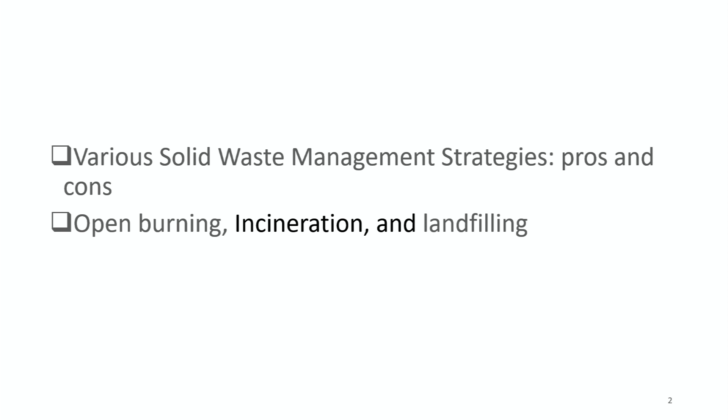We have taken various solid waste management strategies, pros and cons, as well as open burning in previous lectures. Now I am going to undertake incineration. Incineration is a chemical reaction in which carbon, hydrogen and other elements in the waste mix with oxygen in the combustion zone and generate heat.

Incineration is a thermal waste treatment technique that can be understood as a controlled combustion process with the primary objective of waste volume reduction and energy recovery from the waste stream. According to the World Health Organization, the incineration process involves a high temperature, about 200 to 1000 degrees centigrade, dry oxidation process that reduces organic and combustible waste to inorganic incombustible matter, resulting in a significant decrease in overall waste volume.

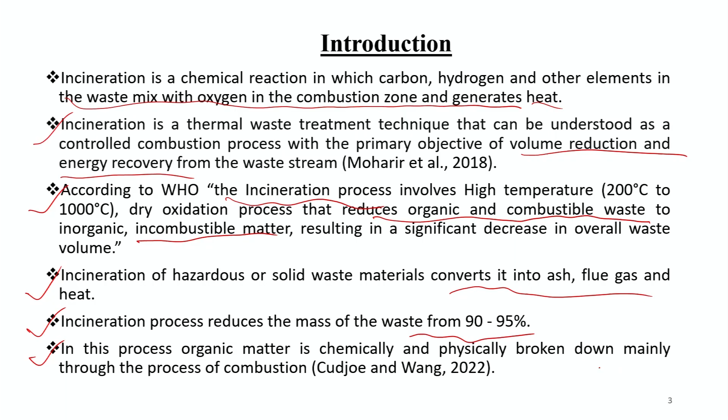Incineration of hazardous or solid waste material converts it into ash, flue gas and heat. The incineration process reduces the mass of waste by 90 to 95%. In this process, organic matter is chemically and physically broken down mainly through the process of combustion. Objective of incineration: by burning solid waste, incineration aims to reduce its volume to around a tenth while avoiding the production of harmful gases and ashes.

Especially the following objectives are pursued by the solid waste incineration process. First is volume reduction. Incineration reduces solid waste volume and weight by 90% and 70 to 75%, offering environmental and economic benefits. It reduces the landfill demand. Next objective is stabilization of waste. Incineration output such as ash is more inert than input due to organic waste oxidation, reducing landfill management issues and organic compounds in landfill leachate.

Third is recovery of energy from waste. Solid waste incineration is a valorization method that uses energy recovered from waste to generate steam for electricity generation or export to local factories or heating schemes. Valorization means the generation or production of value-added products from the waste. This method can replace fossil fuel use and has a lower net carbon dioxide production than burning fossil fuel.

So, the lower fossil fuel use can help the economy of the country as well as save the money of the people doing that. This method can replace fossil fuel and has lower net carbon production than burning fossil fuel, as most energy comes from renewable resources like biomass. Combined heat and power plants increase efficiency. Sterilisation of waste.

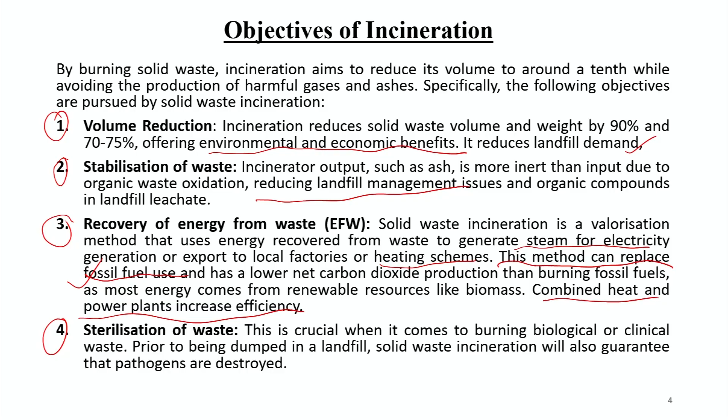This is crucial when it comes to burning biological or clinical waste. Prior to being dumped in a landfill, solid waste incineration will also guarantee that pathogens which may be present in that waste are destroyed. Working principle of incineration: waste materials are disposed of by the incineration process, which operates on the concept of controlled burning. A condensed explanation is given below.

First, the primary combustion chamber is there. A burner is used to ignite waste materials once they are delivered into this chamber. As the waste organic material burns, heat, ash and gases are released. Second, it goes to the secondary combustion chamber, to generate full combustion and lower dangerous pollutants. The gases from the main chamber are further burned here.

Next is air pollution control. To reduce their negative effect on the environment, modern incinerators are outfitted with equipment that filters and treats the exhaust gases. Next is energy recovery. It is an energy efficient waste management method, as the heat produced during the process may be converted into steam or power.

This is a figure showing the diagram of an incinerator, where there is an ash door, a waste or feeding material inlet, a grate combustion air inlet, a burner for burning the waste, and at the upper side a flue gas outlet.

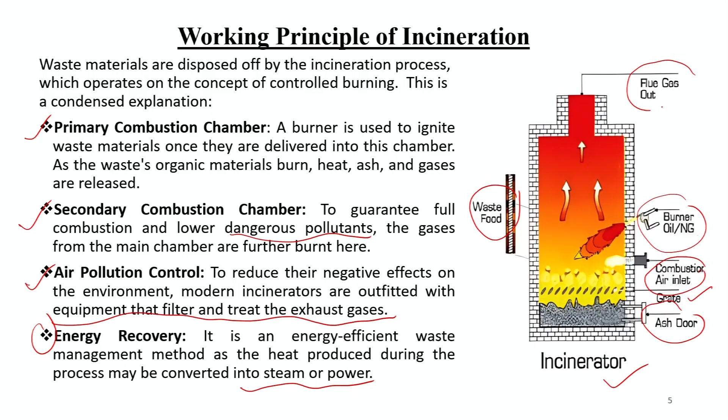The functioning method of incineration. The incinerator's secondary combustion chamber is used to burn off any leftover exhaust fumes, while the primary combustion chamber is used to burn the solid waste or sludge oil. The primary combustion chamber is equipped with a primary burner that is originally ignited by diesel oil. The sludge oil is then fed into the primary burner until it ignites. After that, the main burner is either manually or automatically extinguished.

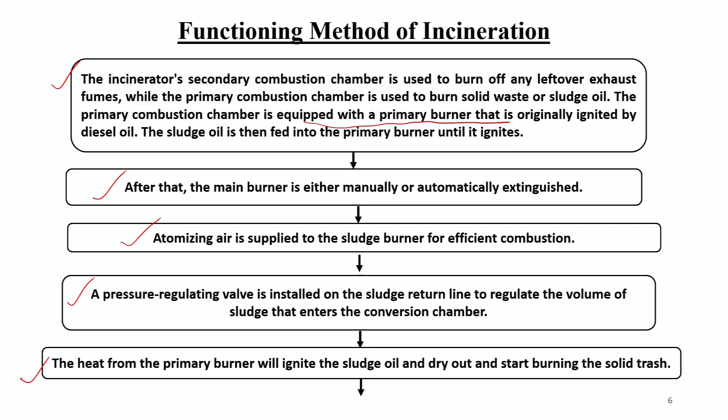Atomizing air is supplied into the sludge burner for an efficient combustion process. A pressure regulating valve is installed on the sludge return line to regulate the volume of sludge that enters the combustion chamber. The heat from the primary burner will ignite the sludge oil and dry out and start burning the solid trash. Thereafter, the massive transmission area of the primary combustion chamber maximizes the drying and burning of the solid waste.

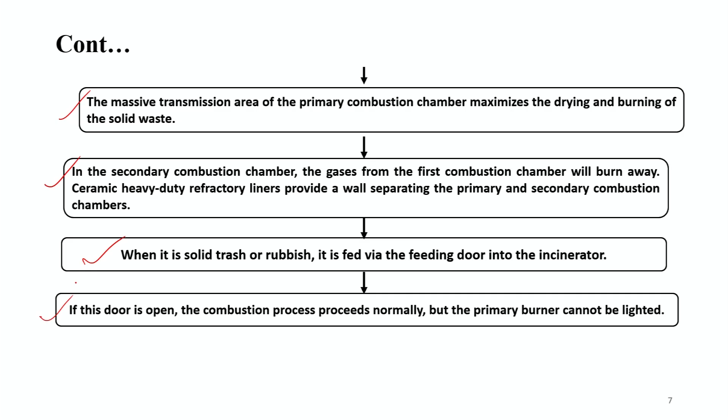In the secondary combustion chamber, the gases from the primary combustion chamber will burn away. Ceramic heavy duty refractory liners provide a wall separating the primary and secondary combustion chambers. When it is solid trash or rubbish, it is fed via the feeding door into the incinerator. If this door is open, the combustion process proceeds normally, but the primary burner cannot be lit.

This figure shows the process of municipal solid waste incineration power generation, where this is where the waste is fed. There is an incineration boiler in it.

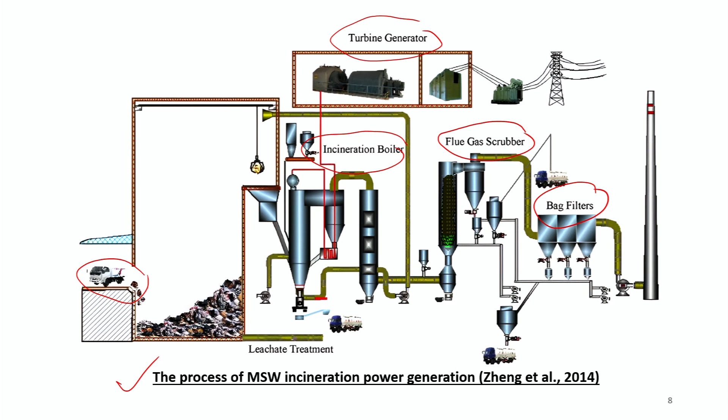There is a turbine generator from which the electricity can be generated. There is a flue gas scrubber where the gas getting out should be cleaned. There is a bag filter to avoid any air pollution or particulate matter pollution, and there is a leachate treatment also, so that we avoid leachate contamination from the waste.

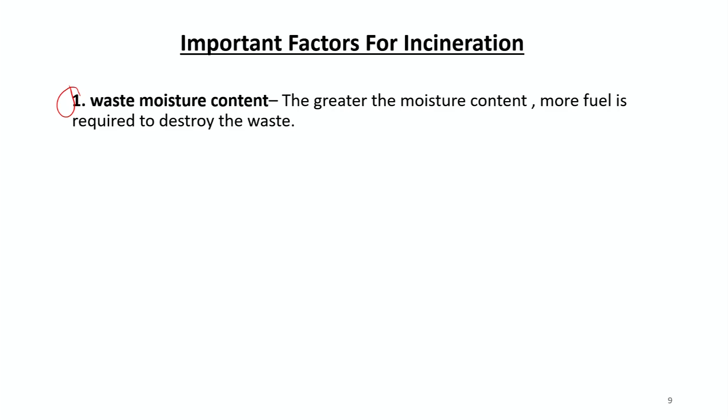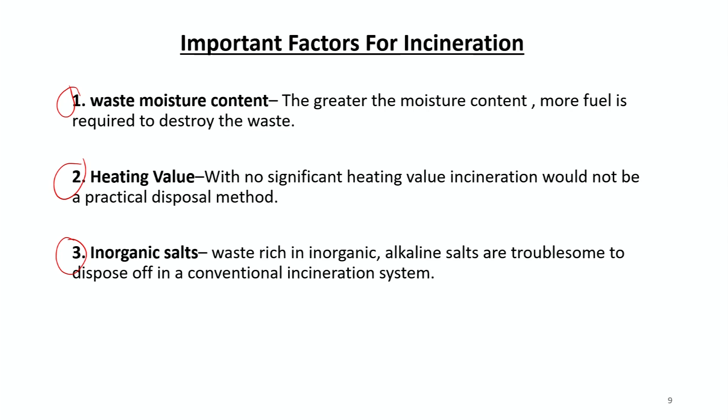The important factors for incineration: first is waste moisture content. Greater the moisture content, more fuel is required to destroy the waste. Second is heating value. With no significant heating value, incineration would not be a practical disposal method. Third is inorganic salt. Wastes rich in inorganic alkaline salts are troublesome to dispose of in a conventional incineration system. Fourth is high sulfur or halogen content. The presence of chlorides or sulfides in waste will normally result in acid forming compounds in the off gas.

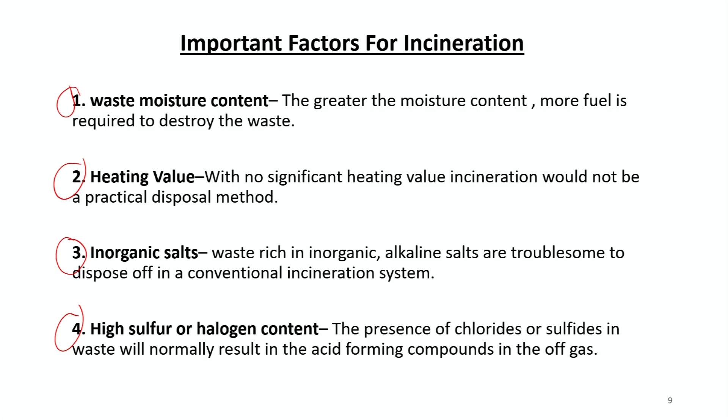Advantages of incineration. Because incinerators are small devices, they may be installed at the location where garbage is generated or in transfer stations, allowing for incineration to take place close to the waste collection site. A decentralized system can be employed with them. A significant reduction in waste volume and mass is realized through incineration. Studies have shown that this method can reduce the overall quantity of waste up to 95% and decrease the solid volume of the original waste by roughly 80 to 85%. Further data suggests that incineration results in waste mass reduction by nearly 70% and volume reduction up to 90%.

Beyond waste reduction, incineration stands as a primary method for energy generation. This process burns waste at high temperature between 750 degrees centigrade to 1100 degrees centigrade in the presence of oxygen. Consequently, heat and energy are produced, affirming incineration as a conventional thermal waste to energy conversion technology that operates optimally at 850 to 1200 degrees centigrade.

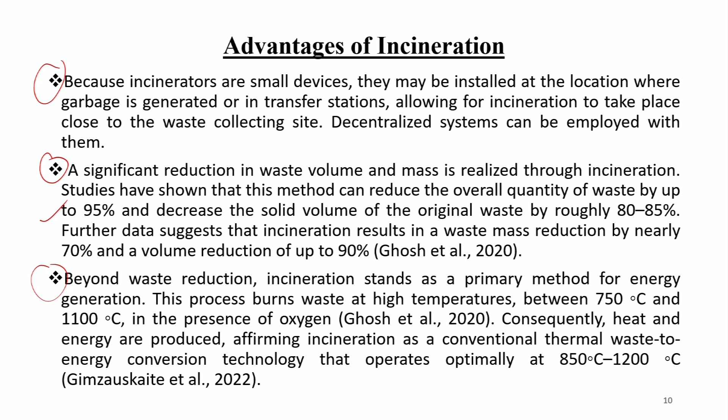Moreover, resource recovery post incineration emerges as an additional advantage. Valuable resources, notably metals, can be extracted post incineration and channeled back into the economy for recycling. This circularity ensures the sustainable use and reuse of valuable materials, fostering a more circular economy.

The byproducts of incineration can also offer considerable value. For example, flue gas contains compounds such as CO2 and nitrogen, which when efficiently captured can be utilized in agriculture and safety related applications. Likewise, the ash produced from incineration, mainly composed of inorganic residues, can be used in the construction industry as an alternative to conventional raw materials. Although MSW incineration ash contains heavy metals and hazardous pollutants, it is also employed in wastewater treatment processes due to its neutralizing property.

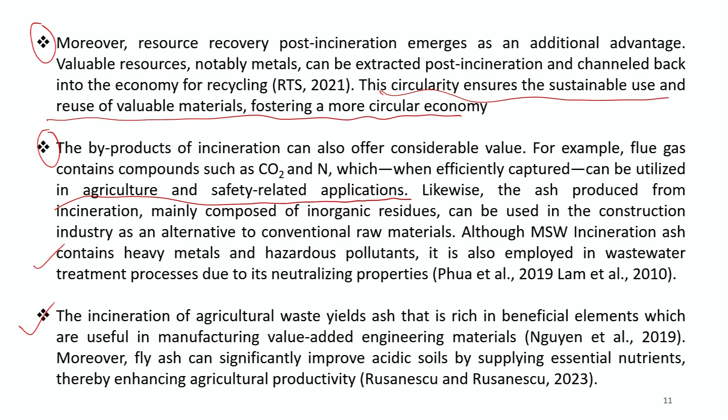The incineration of agricultural waste yields ash that is rich in beneficial elements which are useful in manufacturing value-added engineering materials. Moreover, fly ash can significantly improve acidic soils by supplying essential nutrients, thereby enhancing agricultural productivity.

Environmental concerns with incineration. Various air pollutants are emitted from an incinerator and its control equipment. Apart from air pollution, there are other environmental concerns related to the incineration process, some of which are touched upon below. First is water pollution. Incineration facilities generate wastewater in various forms, including runoff, ash quenching and pollution control systems. These facilities handle sanitary wastewater disposal and surface water runoff. Wastewater is typically recycled in a closed loop system reusing water for ash quenching and municipal sewer systems. Pre-treatment may be required.

Second is land retained pollution. Land retained pollutants originating from stack or fugitive emissions pose increasing concern due to bioaccumulation and food ingestion. Establishing baseline contaminant levels before incineration plant construction can monitor changes.

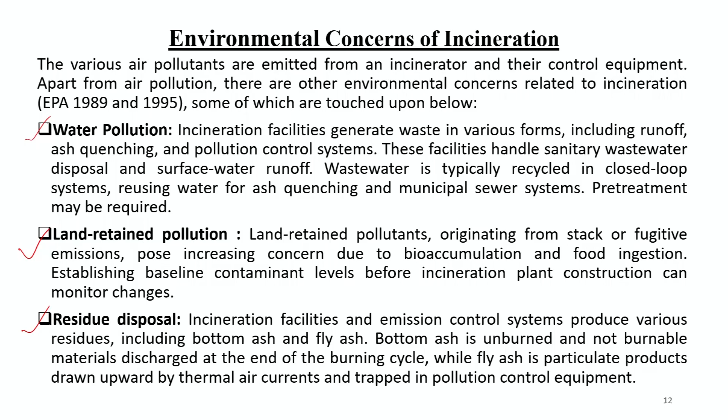Third is residue disposal. Incineration facilities and emission control systems produce various residues including bottom ash and fly ash. Bottom ash is unburned and non-burnable material discharged at the end of the burning cycle, while fly ash is particulate product drawn upward by thermal air currents and trapped in pollution control equipment.

Next, noise pollution. Truck traffic is the primary source of noise pollution in incineration plant operations. Proper maintenance and local ordinances can reduce noise pollution. Plant operations and air handling fans also contribute to the noise. High noise levels are found near waste tipping and ash floor doors.

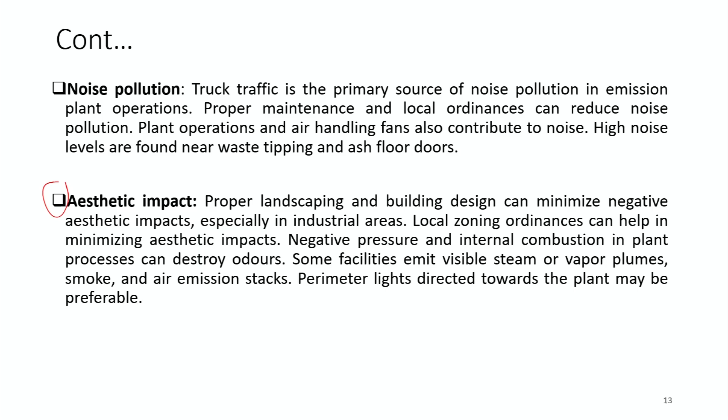Next is aesthetic impact. Proper landscape and building design can minimize negative aesthetic impacts, especially in industrial areas. A local zoning ordinance can help in minimizing aesthetic impacts. Negative pressure and internal combustion in the plant process can destroy odors. Some facilities emit visible steam or vapor plumes, smoke and air emission stacks. Perimeter lighting directed towards the plant may be preferable.

A potential obstacle encountered pertains to the generation of hazardous gas. When combustion occurs in the absence of an adequate air supply, detrimental byproducts including carbon monoxide and dioxins may be produced. Particularly dioxins have been identified as a hazardous pollutant. The reduction of their release is of utmost importance.

An additional noteworthy issue is related to filtration of flue gas. Solid clusters composed of ash particles may be transported by the flue gas. These particles present a hazard to both the environment and human health if they are not effectively removed through filtration. Although the cleaning system is sophisticated, it is complex and requires diligent upkeep.

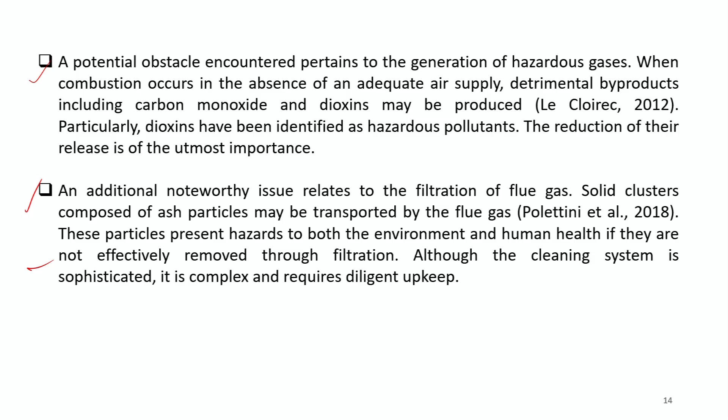First is the rotary kiln incinerator. Two thermal treatment chambers make up the basic design: a slightly slanted primary chamber where waste is fed along with oxygen-containing hot exhaust air, rotated and thermally decomposed by heat radiation from the secondary chamber, and a recombustion chamber at the rear of the kiln where the decomposition air and any leftover waste are completely burned using the

secondary air supply. A revolving combustion chamber in its construction ensures that waste is always moving. The ability of trash to evaporate facilitates the burning process. The waste output rate can be controlled by altering the kiln inclination angle and rotating rate.

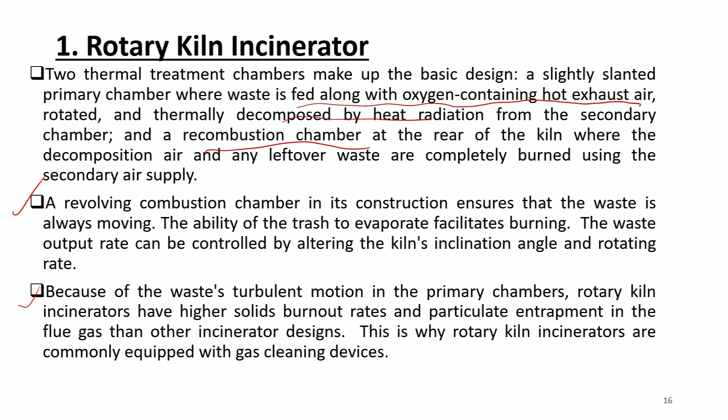Because of the waste's turbulent motion in the primary chamber, rotary kiln incinerators have higher solid burnout rates and particulate entrapment in the flue gas than other incinerator designs. This is why rotary kiln incinerators are commonly equipped with gas cleaning devices. This is the figure of the rotary kiln combustion chamber.

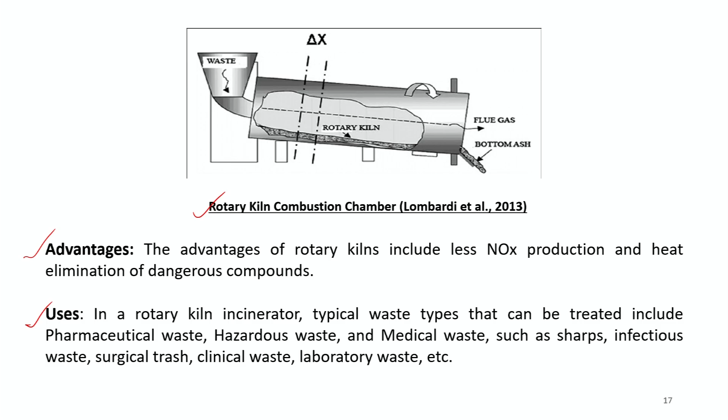As far as the advantage is concerned, the advantages of the rotary kiln include less NOx production and heat elimination of dangerous compounds. As far as the usage is concerned, in the rotary kiln incinerator, typical waste types that can be treated include pharmaceutical waste, hazardous waste and medical waste such as sharps, infectious waste, surgical trash, clinical waste, laboratory waste.

Next is the fluidized bed incinerator. The notion of fluidization is the process of passing a fluid through solid granular material to transform it into a fluid-like condition. The reactor usually consists of a bed of granular material such as limestone, silica sand or ceramic material and a vertical steel tank lined with refractory material.

Several nozzles at the bottom of the incinerator inject air into the bed to maintain its fluidity. As a result, the bed material is violently stirred and the rubbish is burned in close proximity to the bed material and the combustion air. This allows for a relatively low additional air level, which allows for a high thermal efficiency of up to 90%.

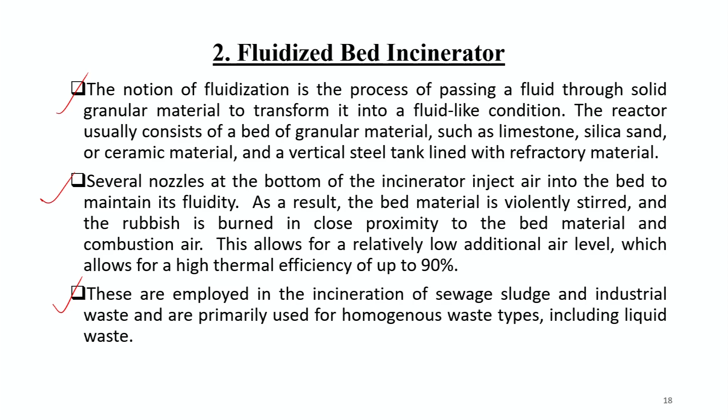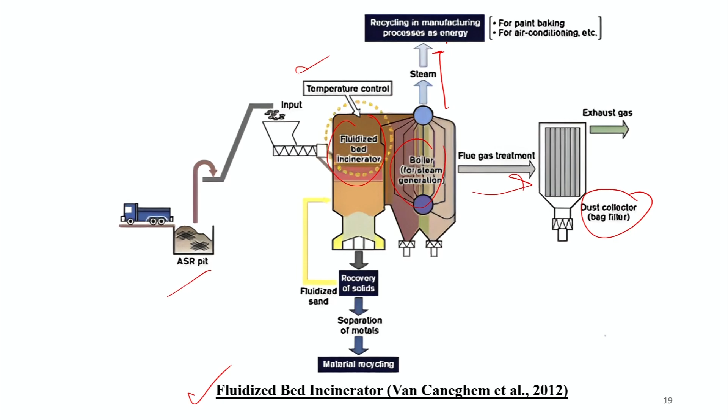These are employed in the incineration of sewage sludge and industrial waste and are primarily used for homogeneous waste types including liquid waste. This is a figure showing a fluid bed incinerator where there is an ASR pit, a temperature control device, the fluid bed incinerator, a boiler and flue gas treatment. There is a dust collector bag also, and the steam is recycled in manufacturing processes as energy.

Moving grate incinerator. The waste is burned in layers on the grate that propels the waste through the furnace in a classic mass burning incinerator based on a moving grate. The trash is dried on the grate and then burned with an air supply at high temperature through the ash chute. The ash and other non-flammable waste fractions leave the grate as slag or bottom ash.

Before proceeding to the conveyor system, the bottom ash or slag which falls from the end of the grate into the water trap of the slag pusher is cooled by coming into touch with cooling water. Slag typically makes up 10 to 25% of waste feed weight.

The moving grate is well established technology, with capacity to handle significant variation in waste composition and heat value and capacity to generate incredibly huge quantities as its key advantage. The cost, which is comparatively high for both investment and upkeep, is the main disadvantage of this technology.

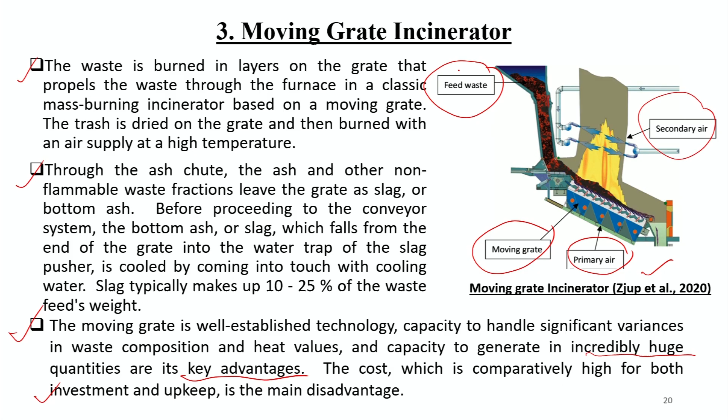This is a figure of the moving grate incinerator. This shows the moving grate. This is the primary air, where is the feed, and then this is the secondary air, and here is from where the waste is fed in the incinerator.

Multiple hearth incinerator. A row of circular hearths set in a column and shielded by a steel shell lined with refractory, with operating temperature between 1400 to 1800 Fahrenheit, make up a multiple hearth incinerator. A vertical rotating shaft passes through the center of the furnace, and feed drops through the perforations into the hearth below. It is connected to rabble arms that move the feed material over each hearth in a spiral pattern. After passing through each hearth, the final product is removed through the outlet.

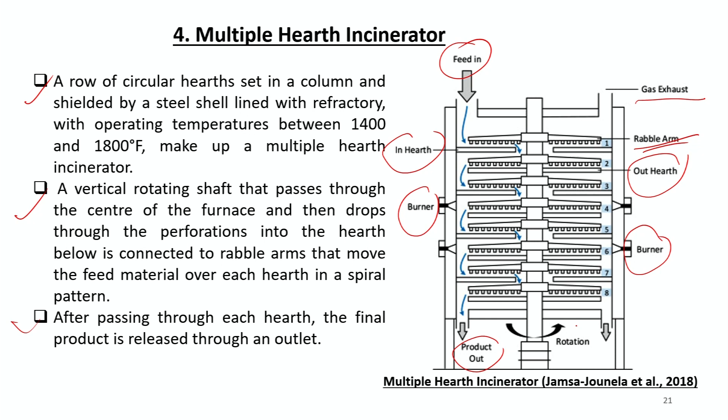This is a figure of the multiple hearth incinerator where there is a burner on both sides. This is the in hearth and this is the out hearth. And this is a rabble arm and gas exhaust. Feed material comes from here and products come out from here. And this shaft is the rotating shaft.

Next is the liquid injection incinerator, a commonly used device that splits liquid waste into tiny droplets for quick burning under high pressure. With operating temperature between 1200 and 3000 degrees Fahrenheit, wastes are atomized into tiny droplets and supplied through nozzles to allow for maximum mixing with air.

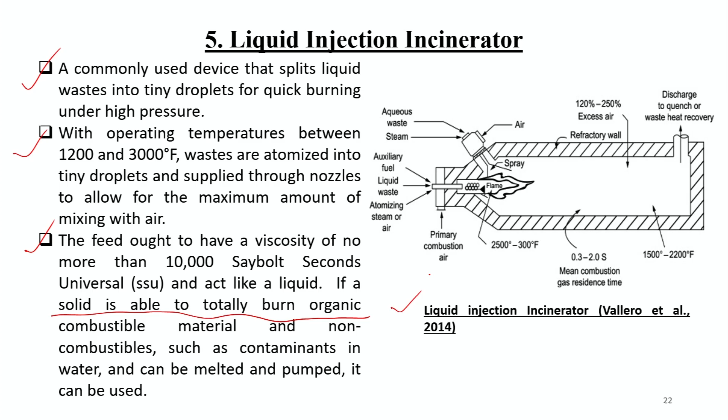Now the catalytic combustion chamber. Engelhard Corporation discovered the process in the 1970s.

A catalyst is used in this chemical process to speed up the intended fuel oxidation reaction and reduce the production of unwanted products, particularly the toxic nitrogen oxides emission, much below what would be achievable without the use of the catalyst. It is used especially for garbage with a low level of organic matter.

Next is the waste gas flare incinerator. Unwanted or surplus gases and liquids are released throughout a variety of industrial processes such as oil and gas extraction, refineries, chemical plants, the coal industry and landfills. These gases and liquids are burned using a combustion mechanism called gas flaring.

Gas flaring is a significant contributor to greenhouse gas emission. It also makes a lot of space unusable and generates noise and heat. It is applied to waste that has a high organic content but is not harmful.

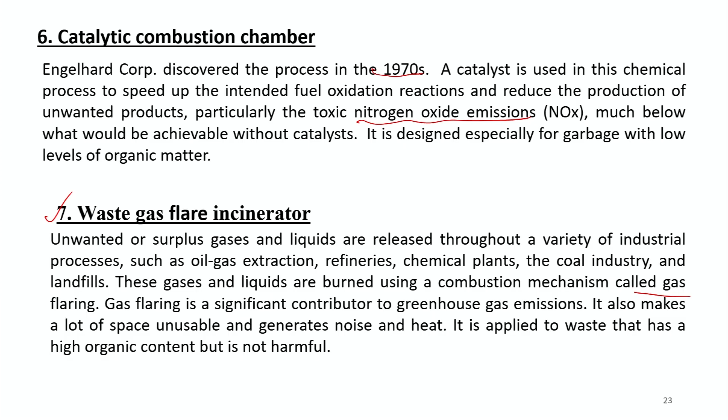This is a picture of a fixed grate or direct flame incinerator. It is often the most widely produced and utilized. Fuel and oxygen are used to maintain the direct flame, allowing trash to be burned. When waste gas contains particles, direct flame incinerators are employed. They run between 1000 and 1500 degrees Fahrenheit.

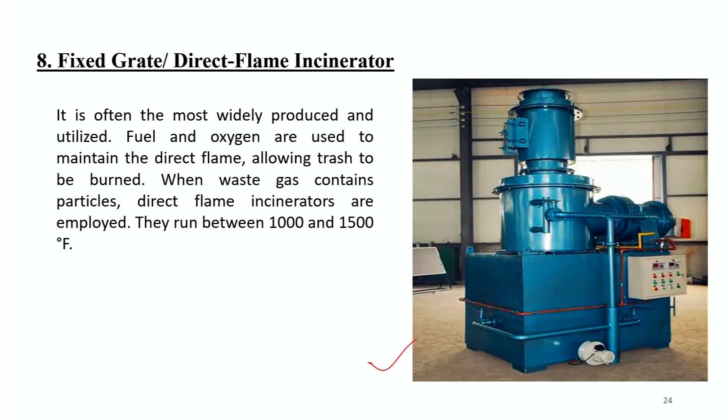The application of incinerators. The applications are for medical waste, animal waste, general waste and nanomaterials. Waste of these types can be successfully burned using the incinerator. Medical wastes, which are not supposed to be burned or disposed of directly, are the best feeding material for the incinerator.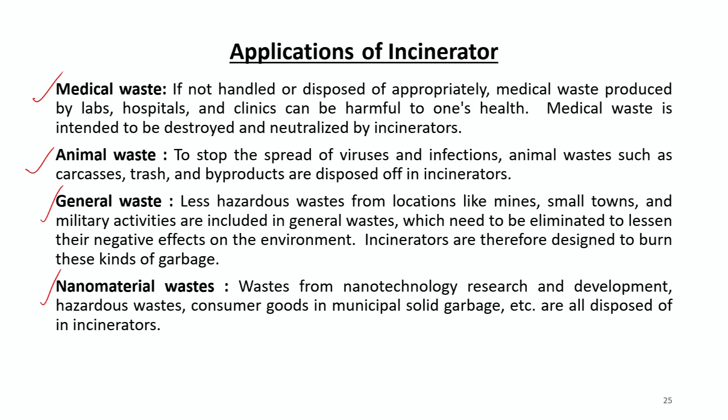Limitations of incinerators. The construction of an incinerator plant necessitates costly equipment and infrastructure, which raises the installation cost. Garbage incinerators have a significant influence on pollution, particularly in the surrounding area, although emitting significantly fewer pollutants than

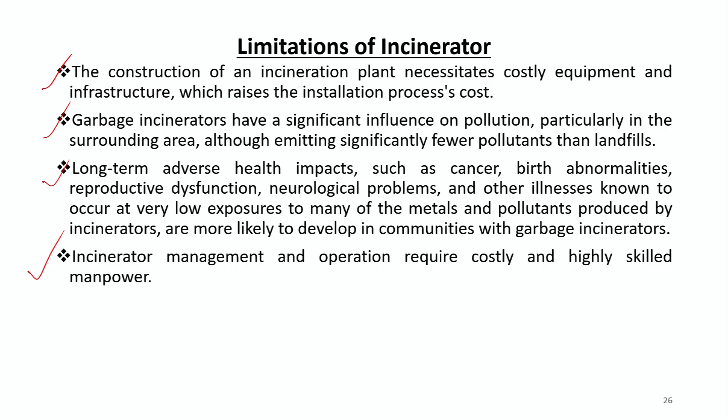the landfill. Long-term adverse health effects such as cancer, birth abnormalities, reproductive dysfunctions, neurological problems and other illnesses known to occur at very low exposure to many of the metals and pollutants produced by incinerators are more likely to develop in communities with garbage incinerators. Incinerator management and operation require costly and highly skilled manpower.

Precautions. Wear full body aprons and heavy duty gloves to prevent sharps punctures or scrapes and cross contamination from the burning process or handling the waste in the incinerator. Sorting the debris before burning minimizes the risk of disease, contamination and damage while also cutting down on operator handling time. The medical waste color coding technique can also be used to achieve this.

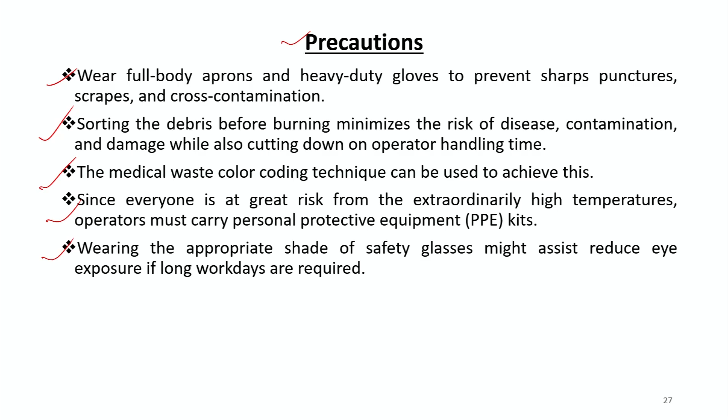Since everyone is at great risk from the extraordinarily high temperature, operators must carry a personal protective equipment kit. Wearing the appropriate shade of safety glasses might help reduce eye exposure if long work days are required.

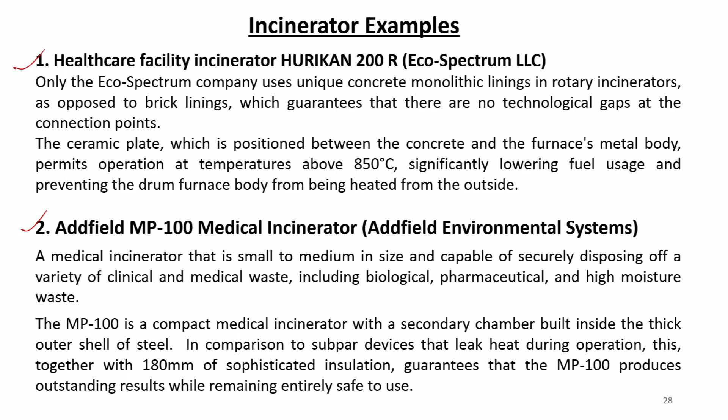These are examples of incinerators. First is the healthcare facility incinerator HURIKAN 200 R. Thereafter, the Addfield MP-100 medical incinerator. It is small to medium in size and capable of securely disposing of a variety of clinical and medical waste, including biological, pharmaceutical and high moisture waste.

The case study of incineration. The case study of incineration provides insightful analysis into the treatment of MSW. It explores various pre-treatment methods to enhance the efficiency of waste incineration for electrical generation. This approach not only addresses waste management challenges, but also contributes to sustainable energy production.

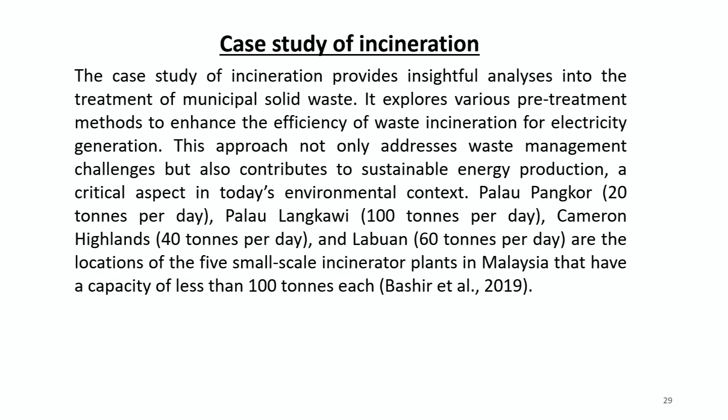A critical aspect in today's environmental context. Pulau Pangkor, Pulau Langkawi, Cameron Highlands and Labuan are the locations of the 5 small-scale incinerator plants in Malaysia that have a capacity of less than 100 tons each. Abd Kadir et al. 2013 emphasized the transition from conventional landfilling to incineration as a strategy for managing MSW. Although less commonly adopted, incineration offers the dual advantage of substantial waste volume reduction and potential for energy recovery.

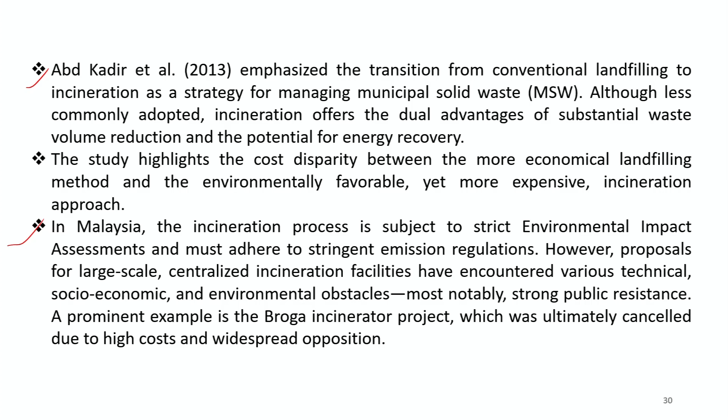In Malaysia, the incineration process is subject to strict environmental impact assessment and must adhere to stringent emission regulations. However, proposals for large-scale centralized incineration facilities have encountered various technical, socio-economic and environmental obstacles, most notably strong public resistance. A prominent example is the Broga incinerator project, which was ultimately cancelled due to high cost and widespread opposition.

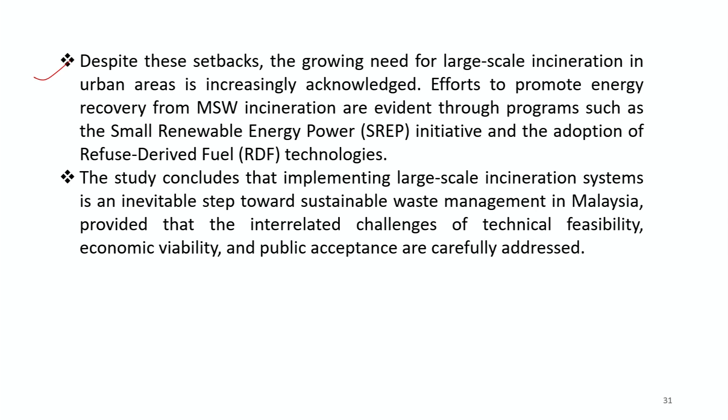Despite these setbacks, the growing need for large-scale incinerators in urban areas is increasingly acknowledged. This study concludes that implementing a large-scale incineration system is an inevitable step towards sustainable waste management in Malaysia, provided that the interrelated challenges of technical feasibility, economic viability and public acceptance are carefully addressed.

As far as India is concerned, the Timarpur plant case study was studied. The plant was built by a Danish company and was intended to process 300 tons of MSW per day, generating 3.7 megawatts of electricity. Capital cost was around 20 crores.

The reason for failure was that the plant was shut down within 21 days of trial operation due to the poor quality of incoming waste. This early failure highlighted the challenges of establishing a successful waste to energy plant in India, particularly concerning waste quality and its impact on plant operation and environmental performance.

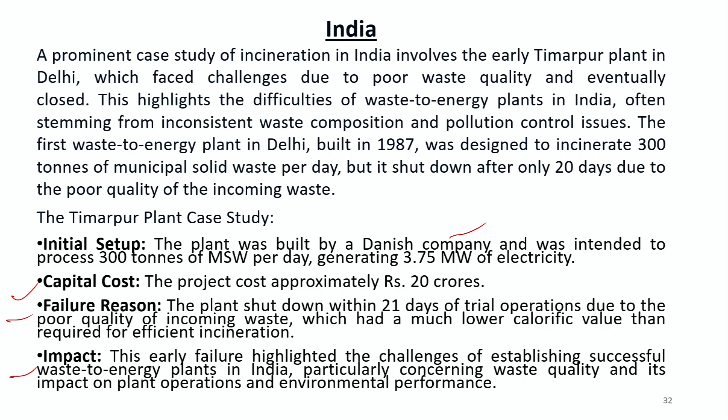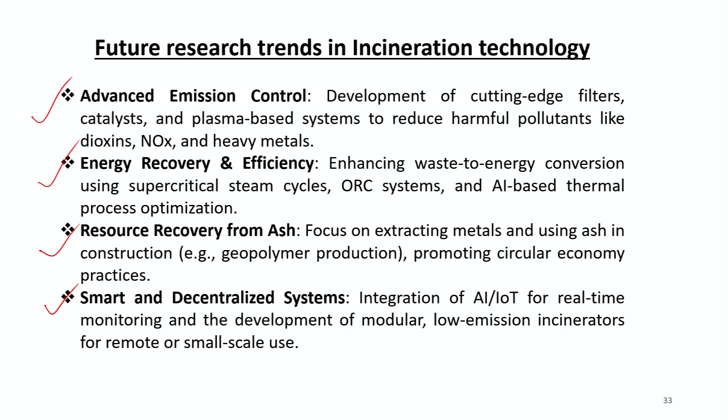As far as future research and innovation technologies are concerned, there should be advanced emission control, energy recovery and efficiency, resource recovery from ash should be carried out, and there should be smart and decentralized systems integrated with artificial intelligence or IoT for real-time monitoring and development of this process.

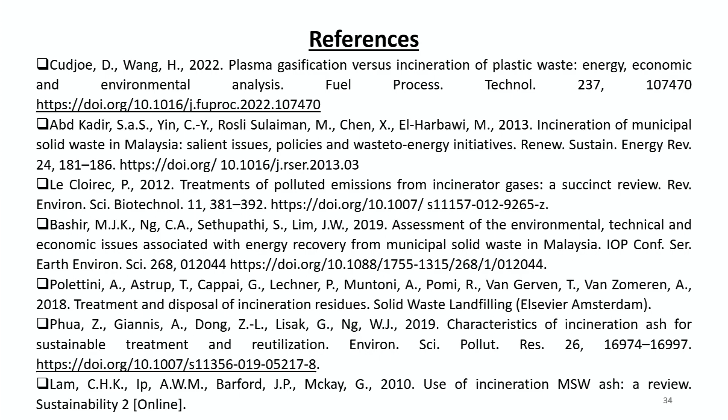These are the references which were used for making this lecture as well as for future studies.